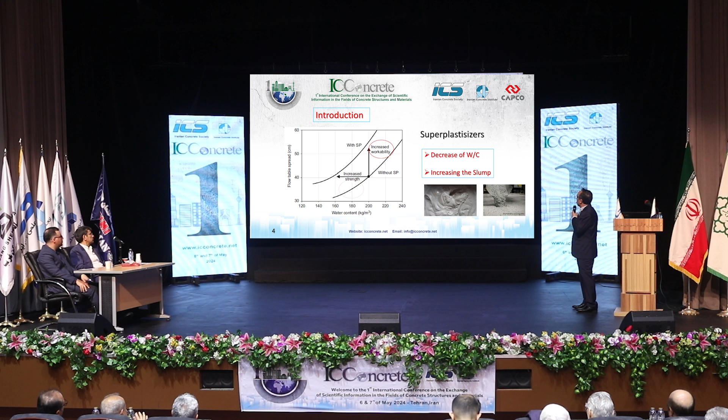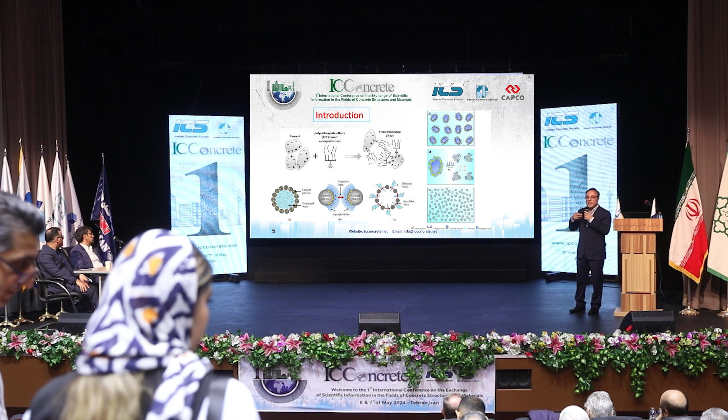One of the most famous superplasticizers used in concrete preparation is polycarboxylate ether, simplified to PCE. How do they work? PCEs are organic compounds that have relatively large molecules with relatively large chains. On one side, they have a negative charge. This negative charge leads to adhering to the cement particles and their separation from each other by steric repulsion. Then the agglomeration in the cement paste is broken, and the encapsulated water is released from inside the agglomerates. This leads to extra water in the concrete that helps us reduce the water content, and the reduction is about 30 to 40%. That is valuable for the production and the final properties of the concrete.

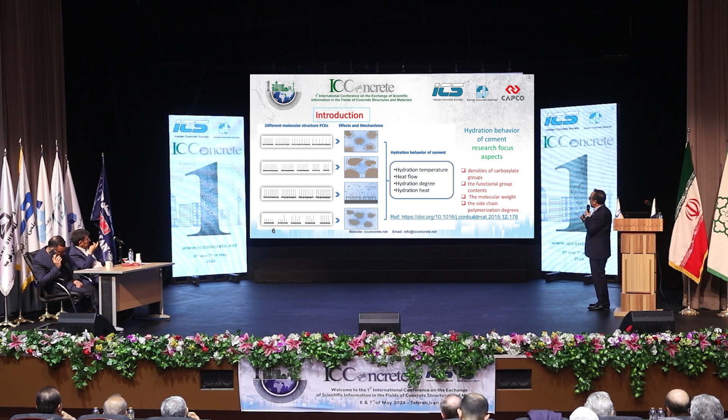Different factors are studied nowadays, and researchers focus on different aspects, such as density of carboxylate groups, functional group content, the molecular weight of the side chains, side chain polymer and polymerization degree. The final carboxylate product, when used in concrete or cement paste, affects the hydration temperature, heat flow, hydration degree and hydration heat in the concrete, which are important.

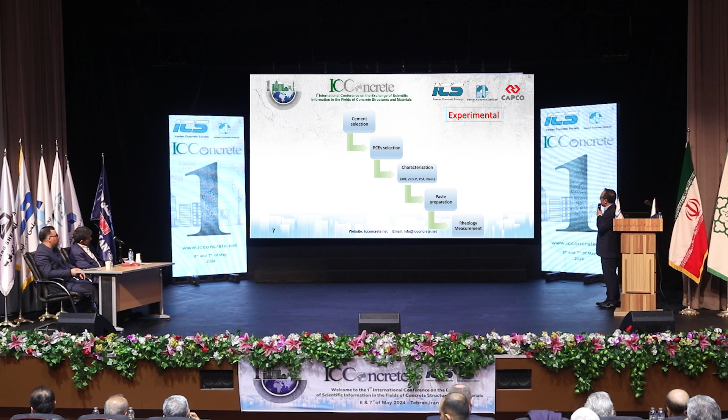As experimental, simply we had 5 stages. First is cement selection; the cement was selected from local factories. Then PCE selection; the PCEs were Capco company products. Then characterization, paste preparation and rheological measurement. Our work was in 2 sections. In the first section, we aimed to study the rheological behavior, comprising shear rate, shear stress, and thixotropy of the cement paste. 4 cements were selected and studied with 3 types of PCE. In section 2, 1 cement with code CEM-14 was studied with 4 PCEs with the aim of studying yield stress, water to cement ratio, and the rheological model.

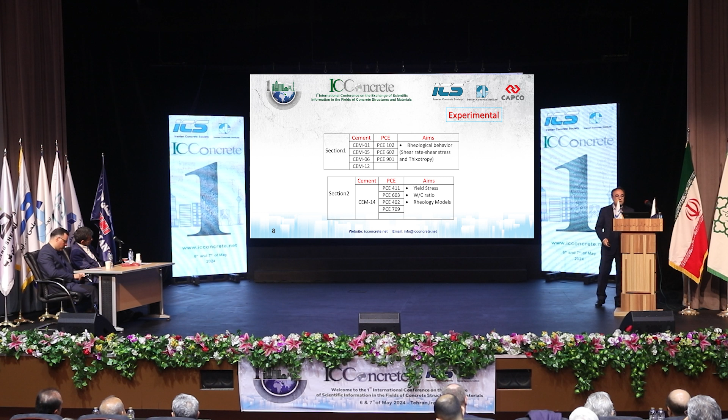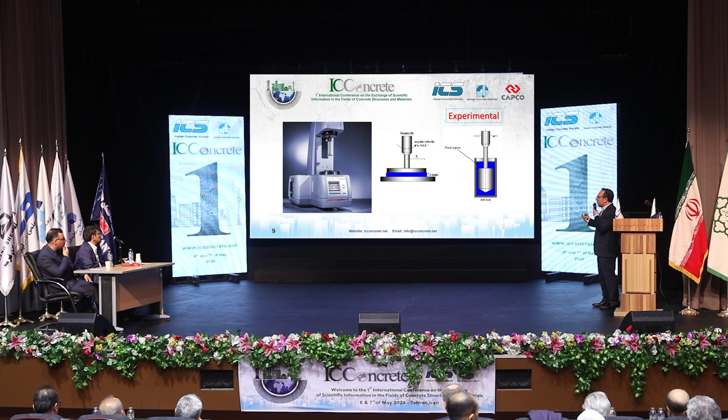For studying the rheological behavior, we used the rheometer from Anton Paar Company with code 302, and the accessories used for cement paste were two types: plate and plate, and cup, for high density and for the paste state. Sometimes the water to cement ratio is low, and we need to use plate and plate instead of cup.

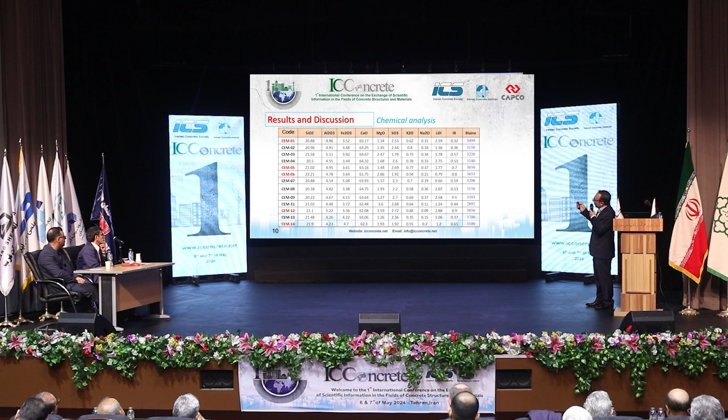In fact, we studied 13 cement samples from different products of local cement factories in Iran. Among them, according to different factors such as chemical analysis, Blaine, zeta potential, and mean particle size, we selected codes 1, 5, 6, 12, and 14.

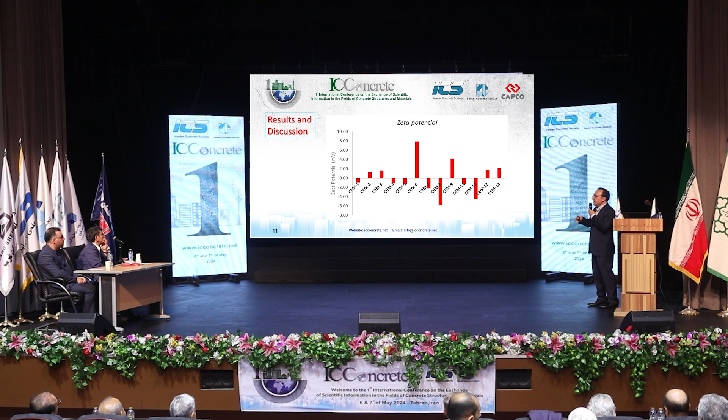As you see in this figure, the zeta potential, which reveals the electrical charge of the particles, was tested by a zeta potential apparatus, and different magnitudes were obtained. The variation is from about -6 to positive 8. As we know, for stable colloid systems, the magnitude of zeta potential should be higher than 35, beyond minus 35 to plus 35. So according to this result, in cements we can't have stability just from zeta potential, and need steric repulsion too.

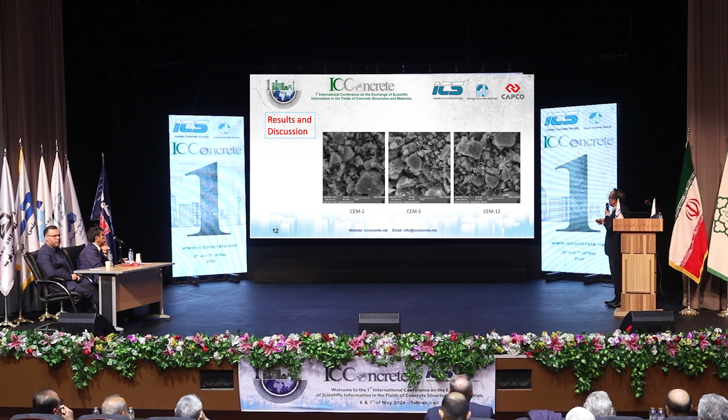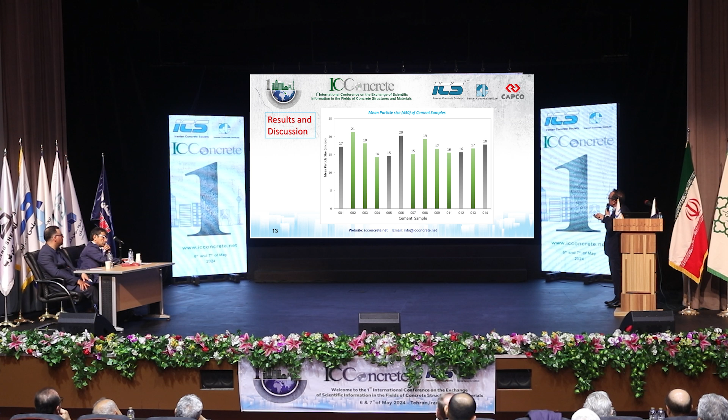The microstructure of the cement samples was studied. For example, cements 2, 5, and 12 can be seen here; the particle morphologies are similar to each other, and there are small to large particles. Here we can see the mean particle size for different cement samples. The gray colors are related to the selected cements. The mean size is in the range of 14 to 21 micron.

The result of viscosity with shear rate shows shear thinning behavior for all the cement samples. This is a common behavior for all samples that have been studied and published before, and our samples' behavior is similar to them.

The shear thinning shows us the initial interactions of the particles, such as the attraction forces that act between the particles. And according to the SEM figure, you saw that the particles have a relatively small size, and at the corners of them the electrical charge density is high, and it leads to the attraction between them, and the interaction is relatively high,

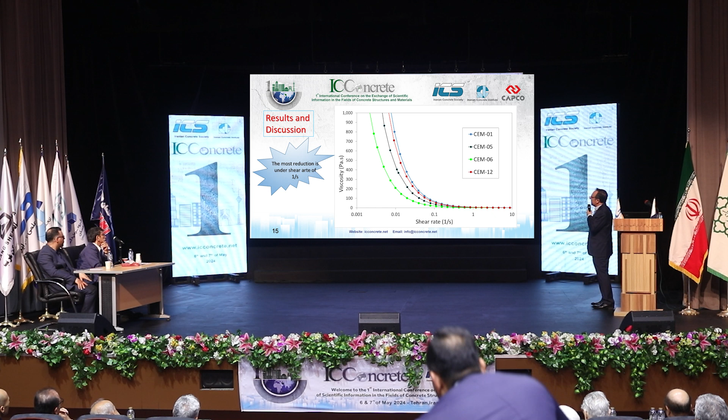especially for low shear rates. If we magnify this section, we see that there is a difference between the cements for viscosity. This is the bare cement with no superplasticizer added yet. And from other aspects, we can see that the most reduction is under the shear rate of 1 per second. That means that the interaction between the cement particles in the paste state is relatively weak.

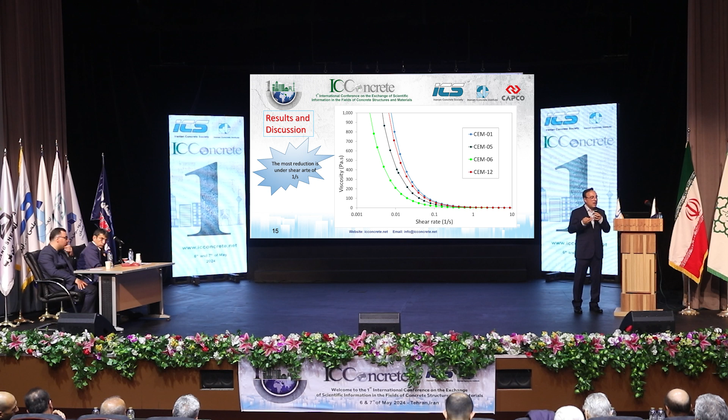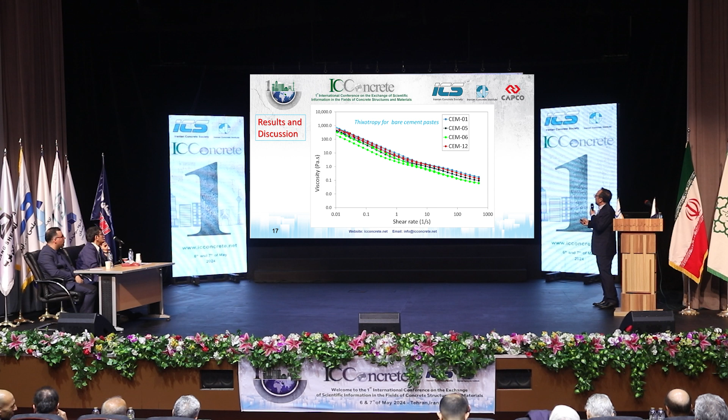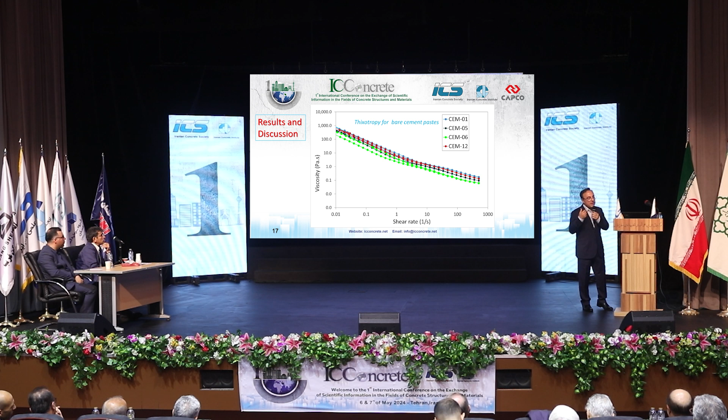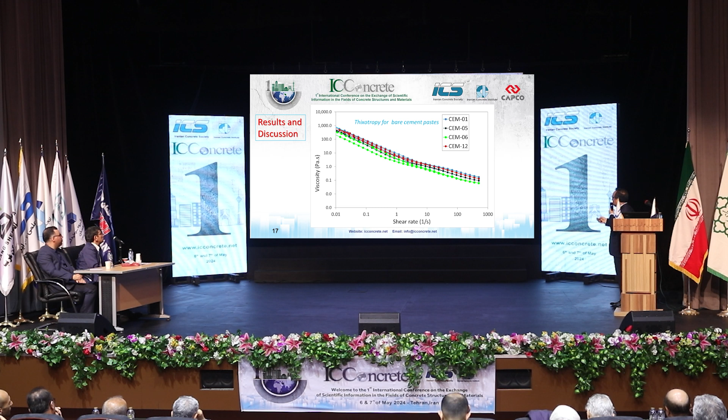And to study the thixotropy, we use the hysteresis of the go and back for the viscosity-shear rate, and the hysteresis form reveals the magnitude of the thixotropy. And as you can see, cement 6 has higher hysteresis, which shows higher thixotropic behavior relative to other cements.

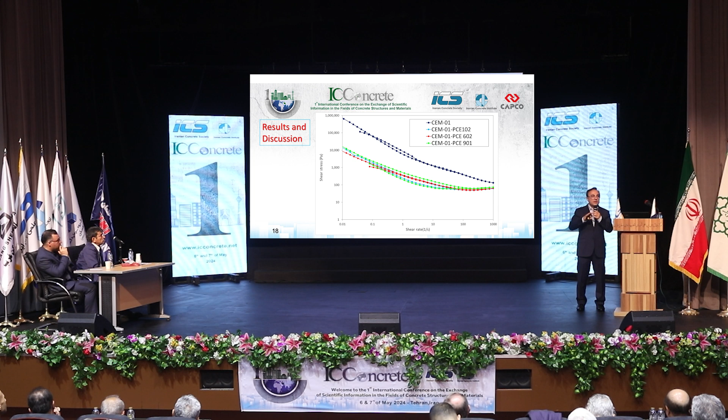Okay. Here we can see, sorry, this is incorrect. The viscosity-shear rate when the PCs were added, the first group of PCs. As you can see, after addition of the polycarboxylate, the viscosity diminished gradually, and the behavior led to Newtonian behavior. Especially here, we can see after addition of polycarboxylate 602 and 102, we have Newtonian behavior instead of shear thinning behavior.

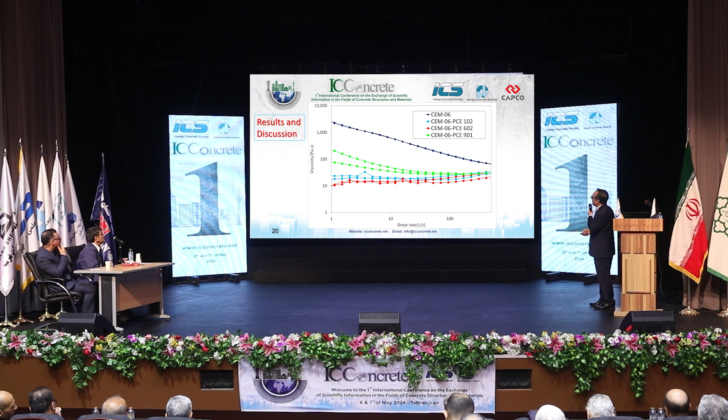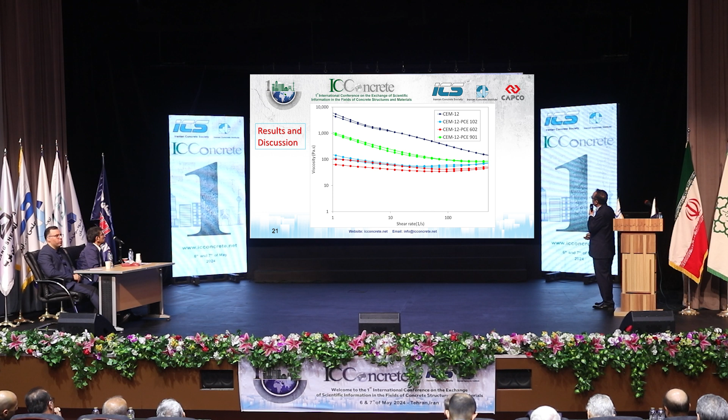Then it reveals to us that the initial interaction, the electrostatic interaction, has disappeared by addition of the polycarboxylate. Then the polycarboxylate has adsorbed on the surface of the cement particle. And similarly for cement 6, it shows similar behavior, but the cement with 901 reveals shear thinning behavior, but with lower viscosities. And for cement 12, the addition shows similar behavior. Then the behavior of PCE 901 is different from the two other PCs.

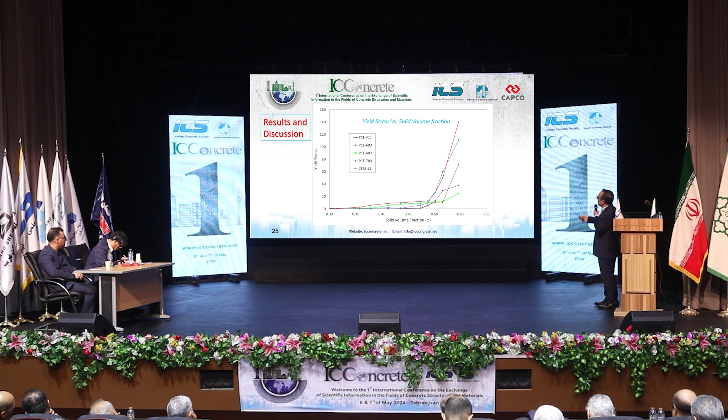Three minutes left, please.

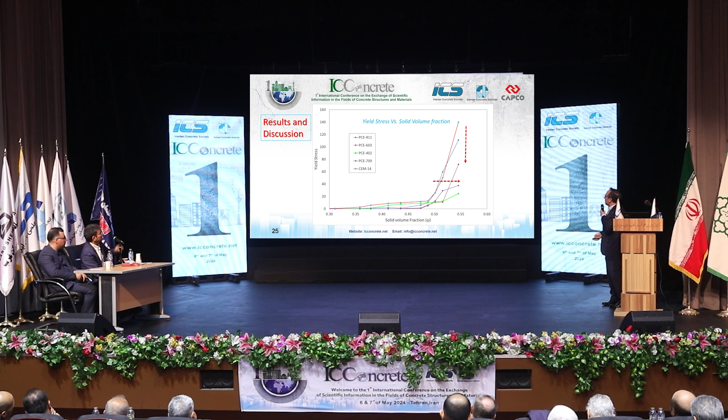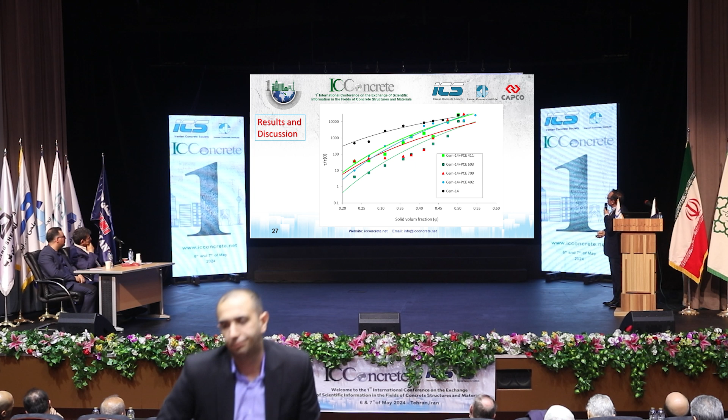Okay, I'm finishing. And the viscosity versus solid fraction, the yield stress, can be seen that the fitted curves are meaningful. And the relative shear stress, here can be seen the magnitude of the yield stress, which, unfortunately this doesn't work. I'll show you, then I'll pass on. The magnitude of the relative yield stress diminished largely with increasing the carboxylates. And in compatibility with the present models, with the Chong model, good fitness can be seen.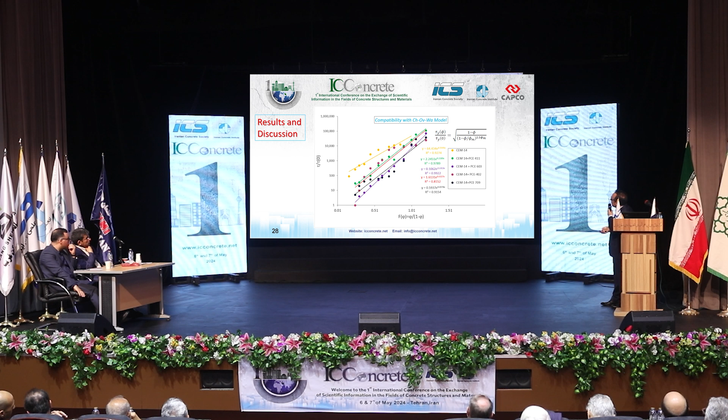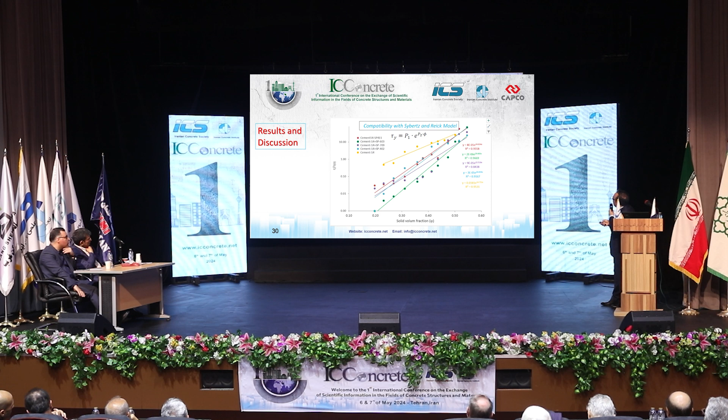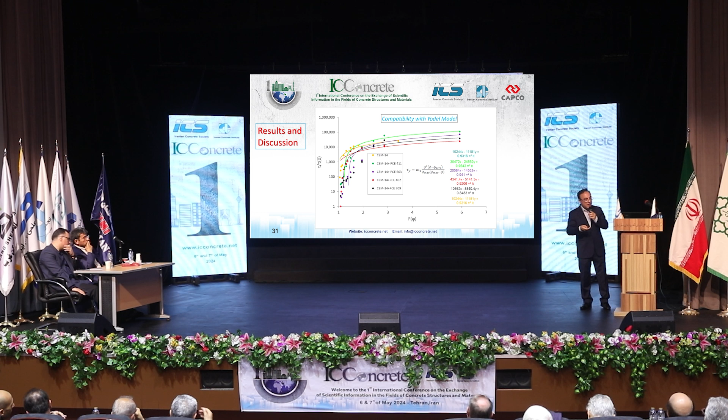And similarly for the Zhu model, we can see good compatibility for some pastes and some additives. And similarly the Reick model and the YODEL model were studied for achieving a way to predict the behavior of the cement paste for different water to cement ratios.

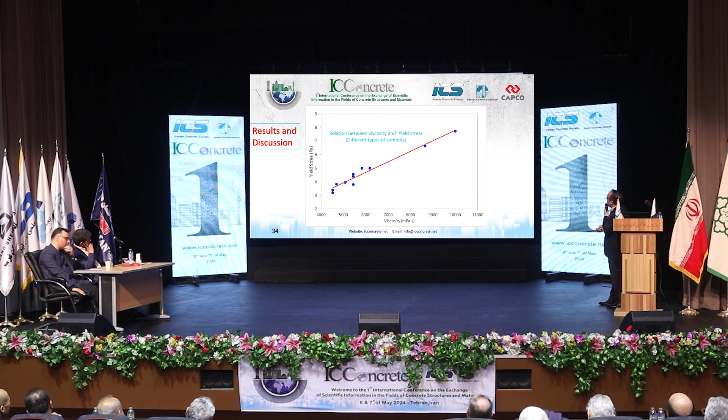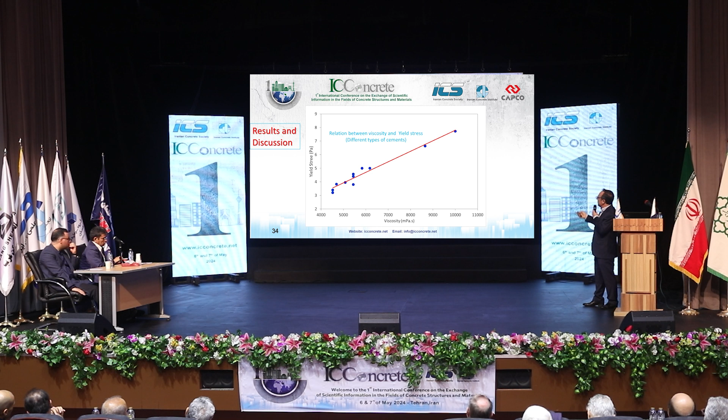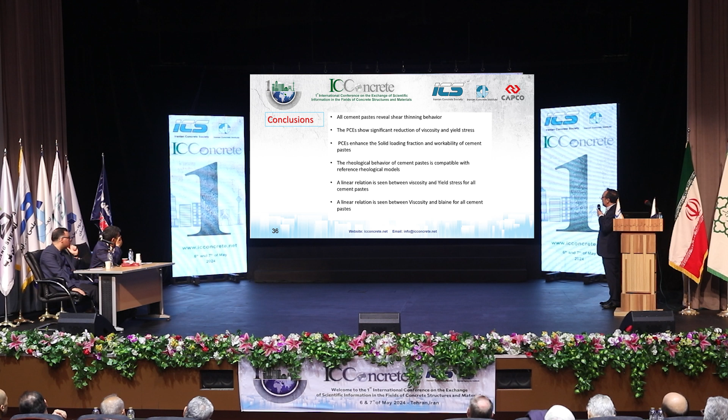And in conclusion, I can say that all cement pastes reveal shear thinning behavior, and the PCEs show significant reduction in viscosity and yield stress. PCEs enhance the solid loading fraction and workability of cement paste. The rheological behavior of cement paste is compatible with the reference rheological models. A linear relation is seen between viscosity and yield stress for all cement pastes. And finally, a linear relation is seen between viscosity and Blaine for all cement pastes.